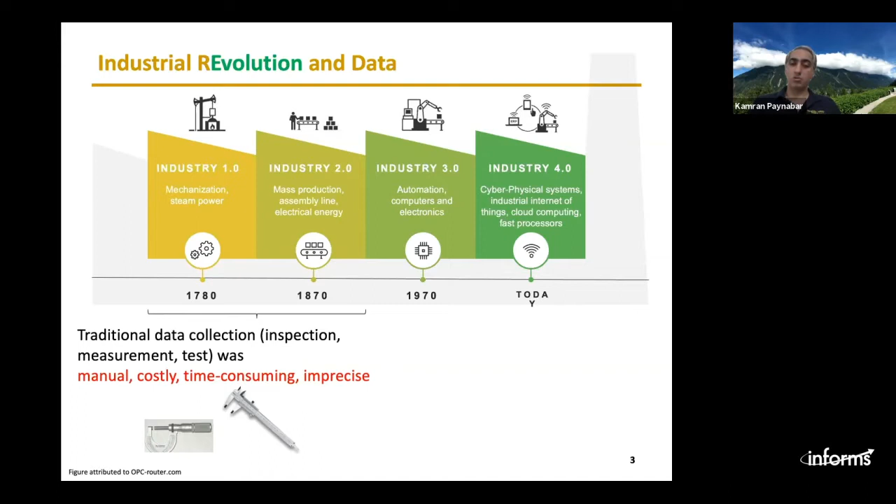So let's look at this timeline from the point of view of data. In the first two eras we had traditional data collection, inspection, measurement, test for quality, and it was manual, mostly costly, time consuming, and sometimes imprecise. However, in the past 50 years, especially during the past 20 years, because of those industrial revolutions, we have significant opportunities in terms of data collection. The technology facilitated automatic instead of manual, inexpensive data collection. It's fast and it's mostly precise.

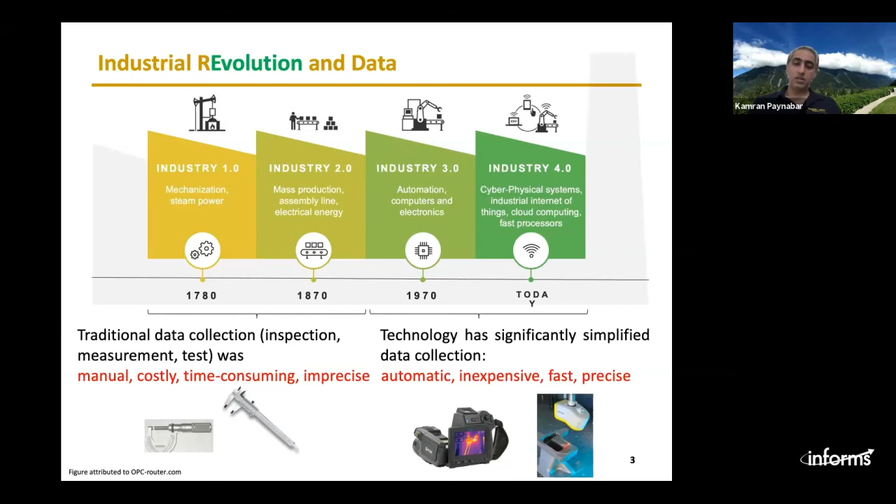Now, this has created a data-intensive environment, a rich amount of data, and some examples of Industry 4.0 type data that we can collect are given here. We can have multi-stream data from sensor readings, for example, pressure, temperature, vibration, and so on. They are mathematically represented by a vector, and the characteristic of the data is cross-correlation among the sensors and autocorrelation over time.

Another type of data collected is waveform signals, profiles, and functional data. For example, here you can see during one operation in a press machine, you can record the exerted force, and that gives you a profile. This is represented as a vector, but it's a function of time or space. They are more high dimensional because each data point can be considered as a function. We still have this temporal correlation, but we have functional structure as well.

Another type of data is multi-channel signals, more complicated, and grayscale images, as you can see when you have different channels of a profile. And this data can be represented by a matrix, as you can see here. And in addition to temporal correlation, we can have spatial correlation as well.

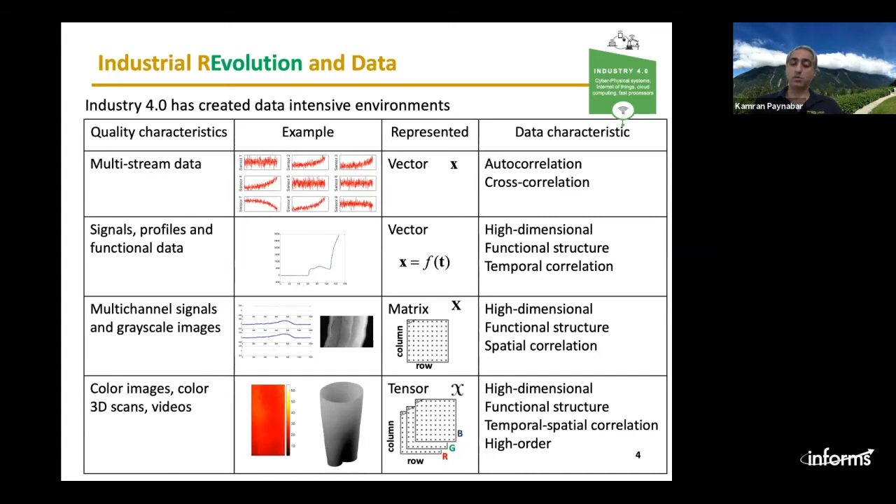And finally, color images, color 3D scans, and videos are other types of high-dimensional data that are collected in this Industry 4.0 environment. And as you can see, they can be represented by tensors or multiple matrices or high-dimensional matrices. And we do have temporal, spatial, and higher order spectral correlations as well. Now, this is the type of data that we have. It gives us opportunity for what?

For process modeling and optimization, for monitoring and anomaly detection, prognostics and degradation analysis, process control, and diagnosis and root cause identification. Basically, for all the classical and traditional problems in quality and reliability that we had before, we have opportunities of using this intense, high dimensional big data to have a better contribution in these areas.

However, as you know, there is no such thing as a free lunch. So it comes with significant analytical challenges due to data high dimensionality, the heterogeneous structure of data. Some of them are profiles, images, videos, point cloud, scalars. Complex correlation in terms of temporal, spatial, and spectral correlation. The need for real-time analysis, because we know that the data are collected much faster. The sampling frequency is pretty high.

So therefore, especially for the cases of monitoring, analysis and control, we need to do analysis on the fly. So we need to have agile computational algorithms for computational complexity, both in time and space, and also dealing with this data requires interdisciplinary expertise that I explain later.

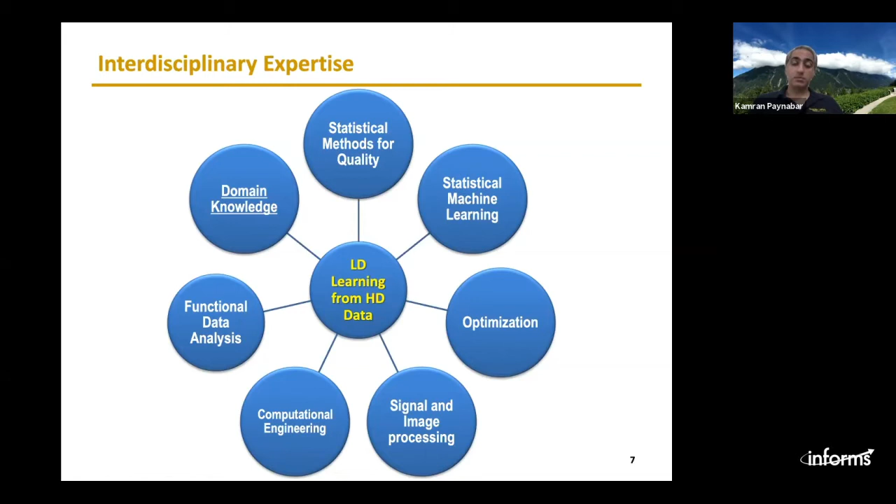Okay, at this point of the talk, I'm gonna talk about how this low dimensional learning can be used for different purposes. I start with monitoring and anomaly detection. So let's look at some applications of system monitoring using high dimensional streaming data. There is one example here, as you can see, the valve seat assembly process. You have a press machine that tries to assemble these valves inside the engine head, as you can see.

And during each operation cycle, I collect this force profile, and I have different operation cycles over time. So it gives me a series or a stream of these profiles. Same thing happens with multi-channel signals. In forging applications, you have 4 sensors mounted on the 4 columns of the machine.

And during each operation, I have 4 channels of the signals. And then I have multiple of those. And I want to use that to monitor the process, for example, to see if there is any missing part in the forging machine.

The rolling is another example. We use a camera to monitor and inspect the surface of rolling to see if there is any quality problem or not, as you can see in this video. And if there is any quality problem here, as you can see, we want to detect it.

Another example is in semiconductor manufacturing, where we have images of a stress map to detect the location, high stress location and defects. So the objective is we want to develop a real-time monitoring method that can be used for all of these types of data.

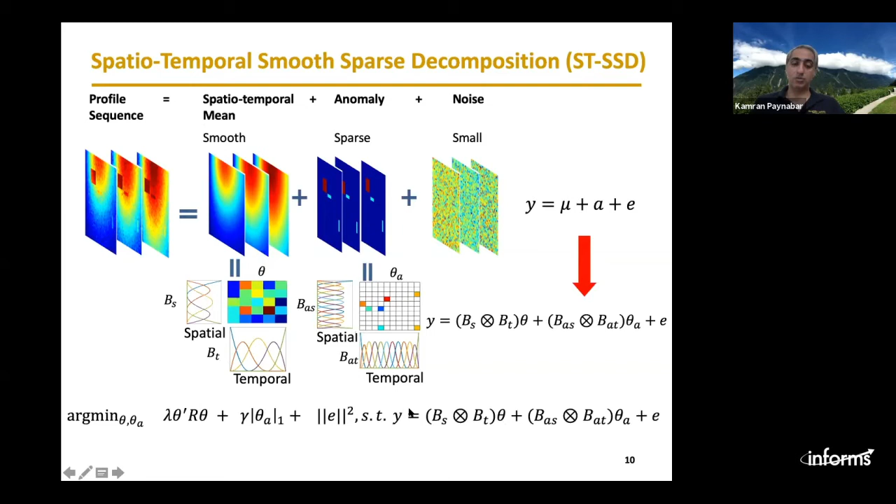And also we have an L1 norm penalty, which encourages the anomalies to be sparse. Then we have a constraint which says when you estimate these and put them together, you want to get your actual, original data. So how can we solve that? We can solve this using basically the accelerated proximal gradient method by Nesterov or an iterative thresholding algorithm.

There are some computational challenges because of the dimension; we have both spatial and temporal dimensions. And we need to have matrix inversion, and the complexity is of order 6. Then, using some tricks and change of variables, we can reduce this to cubic order, which is much better. But the problem is not just that.

The problem is in the optimization over time. So assume that we have these 3 sample data. I run and solve this optimization for these 3. Then in the next step, I have another one. So I need to solve the optimization for these 4, and then for these 5, and then for these 6.

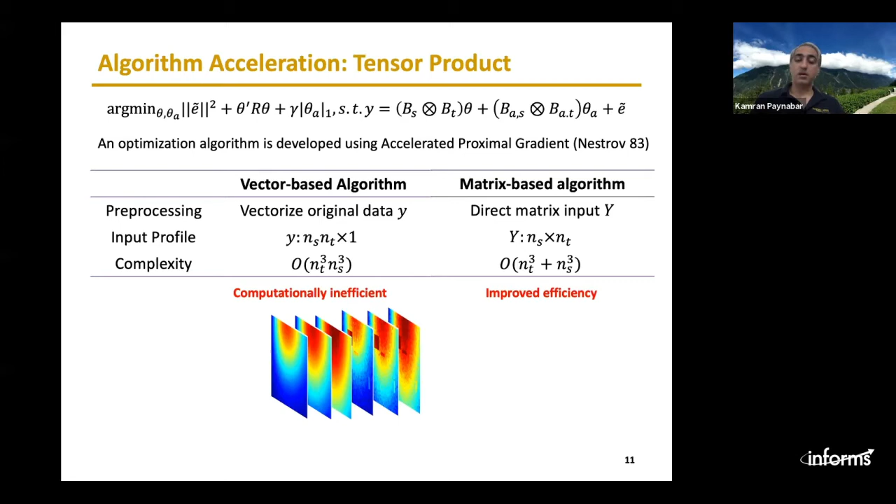So as you can see, when I have new images or new frames of data, then I need to basically solve the optimization problem. At some point, the computational complexity cannot be handled by any algorithm. It's going to explode. So what would be the potential solution?

The potential solution is we can come up with a recursive estimation framework. What does it mean? It means that I can use the solution of the optimization problem at time t and the data coming from t+1, and using this data, I can update the optimization solution.

So that creates a lot of efficiency in terms of optimization and estimation. So under some simplifying assumptions, which is not bad and non-realistic, it's a good assumption, we can show that the solution to the optimization problem along the time direction is in the recursive form. As you can see, solution at time t is a linear combination of the solution at time t-1 and the data at time t. Okay, so that significantly simplifies the computation.

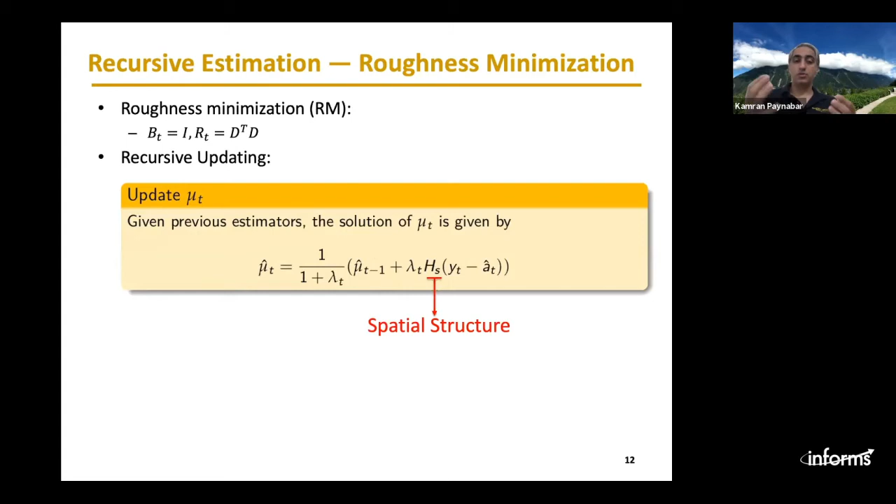So as you can see, this is kind of like the temporal structure, and this part is the spatial structure. So we are combining both temporal and spatial information to update the solution. And in the space, we can also use the previous algorithms and update the solution. So this recursive updating can help us to analyze the data on the fly.

Okay, and as you can see, the computation doesn't depend on the time anymore. So it's fixed, and here we have an index of time, but here we can see it's fixed, and that is the main point, an important point for making the algorithm real time. So here is one simulation I want to show you.

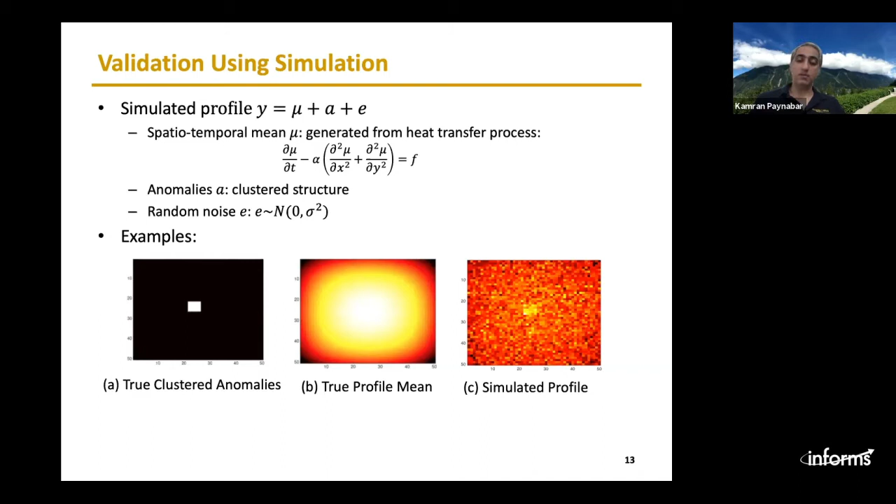This is kind of like a heat transfer process. If you, for example, heat up a steel metal, you can see heat is propagated over the surface. So we are trying to simulate that process, which is a smooth spatio-temporal behavior. And in this video, you can see that in the top left corner, you will see original data, which is very noisy.

Top right, you can see the estimation of a smooth spatio-temporal behavior of the heat transfer process. Here, you can see the detected anomalies, and we have also a control chart. If we detect anomalies, we feed it into a penalized likelihood ratio test to see if it's significant statistically or not. So when I run it, you can see that everything is fine at the beginning.

There are no anomalies, but the spatio-temporal estimation, you cannot see it here, but after estimation, we can see it here. Suddenly we have a defect, we can detect it, and that can be detected here using the control chart. And again, this one is being done in real time.

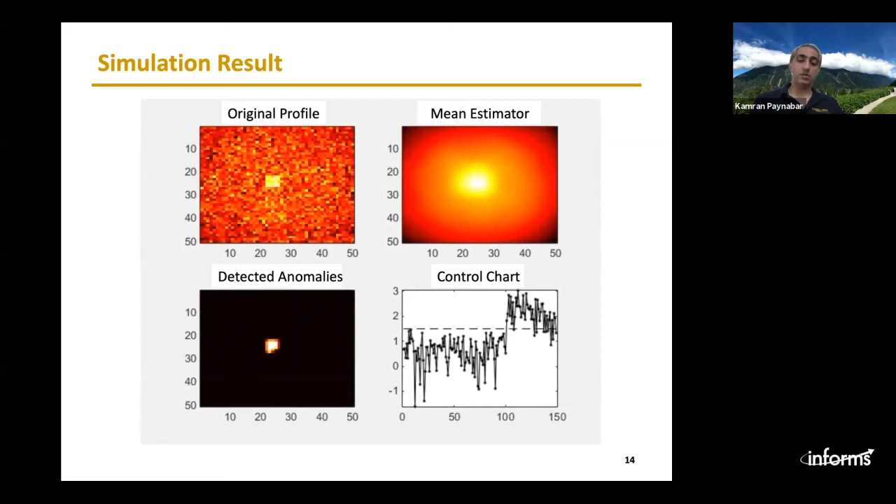Let's look at some case studies. This is the rolling process that I discussed before. So this is the original image of rolling. This is the background, which is estimated. And if there's an anomaly, we detect it here. As you can see, we detect some anomalies, and then the control chart goes out of control.

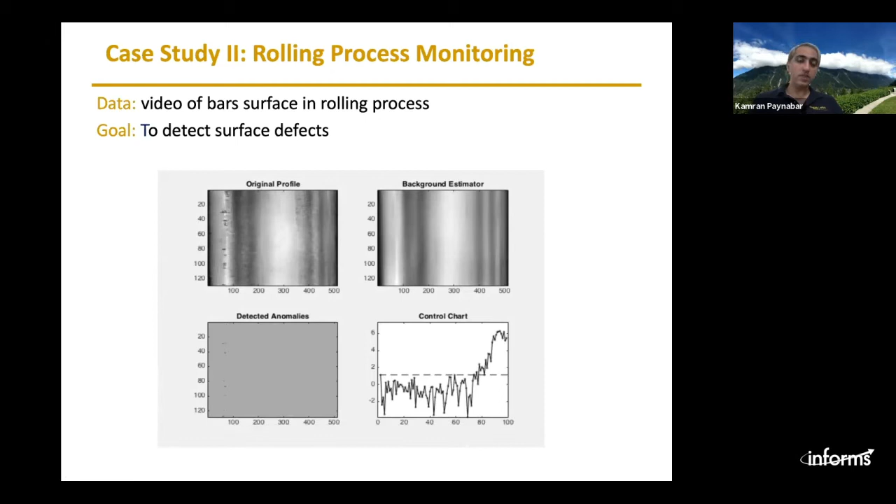As I mentioned before, it's important, this methodology is not just limited to videos or images. It can be used for any types of high dimensional data. This is another example where we used it for multi-channel signals in the forging process. So you can see there are basically different operations over time.

We have this sequence of profiles, and then there is a missing part at some point, and we can detect that missing part here. And as I mentioned before, we can do diagnosis. For example, here using this heat map, I can pinpoint which channels are more sensitive to that change, and which area of the signal is more affected.

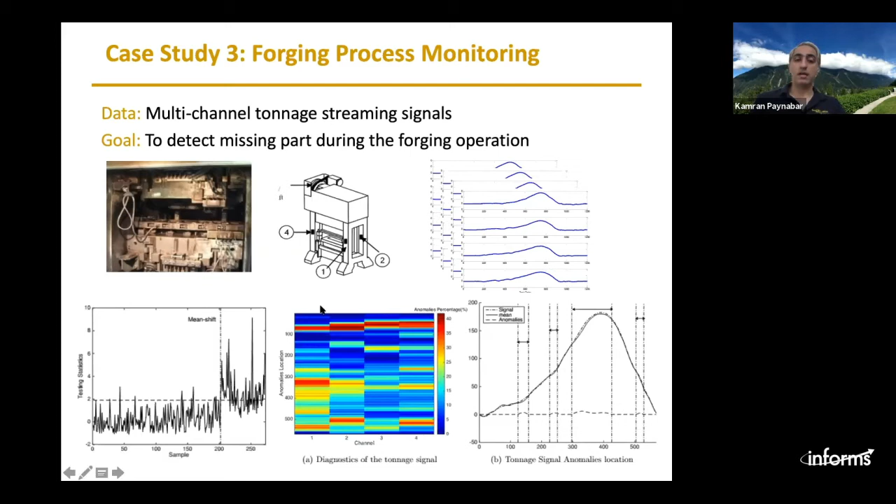As you can see, channel 1 is more sensitive to this change, and it turns out the missing part is closer to this column, which is captured by channel 1. Okay. So here are 3 examples of how this framework can be used for process monitoring and anomaly detection.

The second topic is process modeling and optimization. So in some cases, we are interested in finding the relationship between process variables and the quality characteristics of output, okay? One example is in semiconductor manufacturing. This is sort of a stage-wise and layer-by-layer process, and in each layer we have deposition of some pattern.

And it's really important that these layers be aligned. The misalignment of these layers creates something called overlay error. And this overlay error can be represented by a heat map, as you can see here. 0 is where there is no overlay error, and then the rest is basically deviation from that 0.

And this can be influenced by a series of process variables, as you can see here, for example, deposition rate, temperature, pressure, and so on. Now, these process variables are in the form of profiles, and the output is in the form of images. So both of them are high-dimensional data. The question is how I can find a function which shows the relationship between these two, because later on that function can be used for process optimization or prediction.

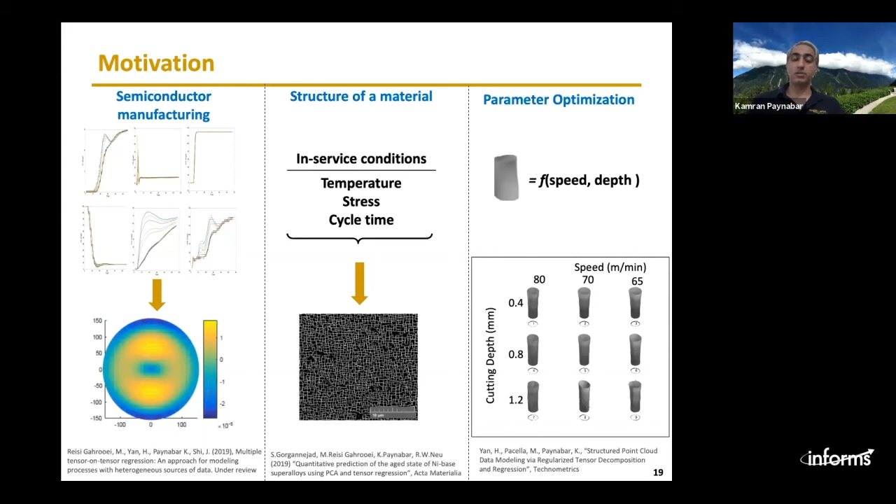The last example is process optimization, parameter optimization. Here is a machining example: in machining we are producing, let's say, cylinders, and two variables are important, the speed of the machine and the cutting depth. We want to know the relationship between the speed and depth, and the outcome is the point cloud, which shows the geometrical information or dimension of this cylinder. There are other examples here, but I skip them in the interest of time.

But here is the problem that we are trying to model. We have n samples of training data, and these samples are heterogeneous high-dimensional data. For example, they could be images, profiles, or point clouds. And the output could also be anything: a scalar, a point cloud, any high-dimensional data. What we want to do is use this training data to learn a function which relates these inputs to the output, and then use this function later for prediction or process optimization.

The methodology that we use here is Tensor-on-Tensor regression. So what is a tensor? A tensor is a multi-dimensional array. For example, a vector is a one-dimensional, or first-order, tensor. A matrix is a two-dimensional tensor, and a sequence of images is, for example, a three-dimensional tensor. Okay. Now, the way that we want to model the problem, as I said, is as a regression problem.

So Y is a high-dimensional object, and we have an inner product of the input and the corresponding coefficient, plus some noise. This is very similar to regular linear regression. The only difference is that the objects, the coefficients and the inputs, could be different. One could be an image, one could be a profile, and the dimension of the coefficients corresponds to the type of input that we have.

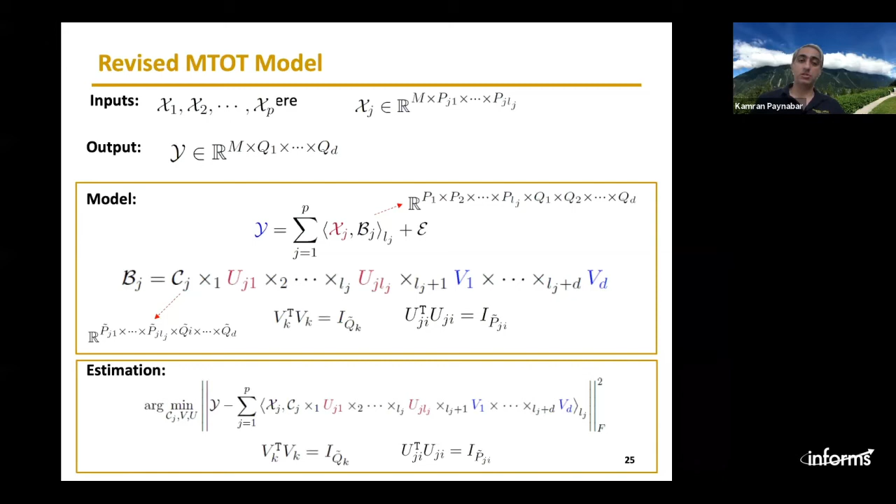Okay, now let's look at the case study here, the process optimization. So you remember the input is a scalar, speed and depth, and the output is a point cloud. We want to first learn the A, which is the tensor coefficients. Using this methodology, we can do that. This is the coefficients for depth. This is coefficient for speed. For example, if depth is 5 multiplied by this coefficient, and whatever speed is multiplied by this coefficient, we can get the resulting point cloud.

Okay. Now, at the end of the day, we want to optimize the process. And optimization here means that I want to minimize the deviation from nominal values, the ones that I have from the drawings, from the design. And at the same time, I want to make sure that the variance is less than some desired value. And I know that I have operational range for speed and operational range for depth.

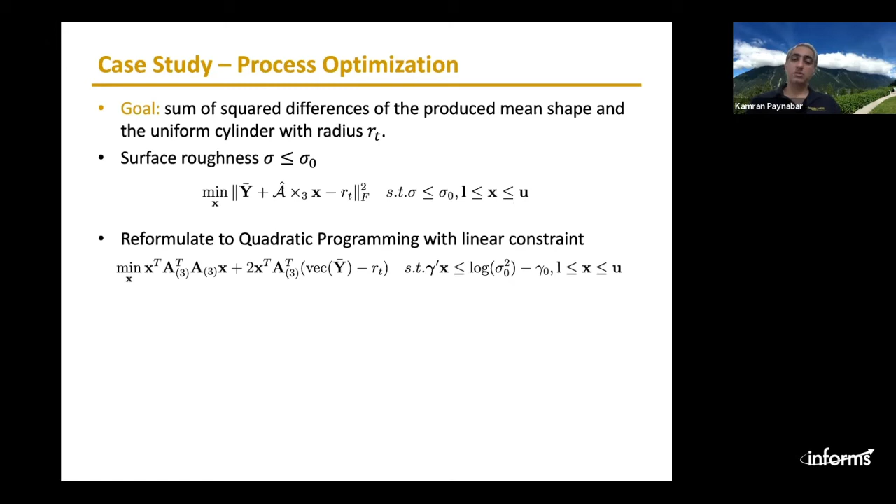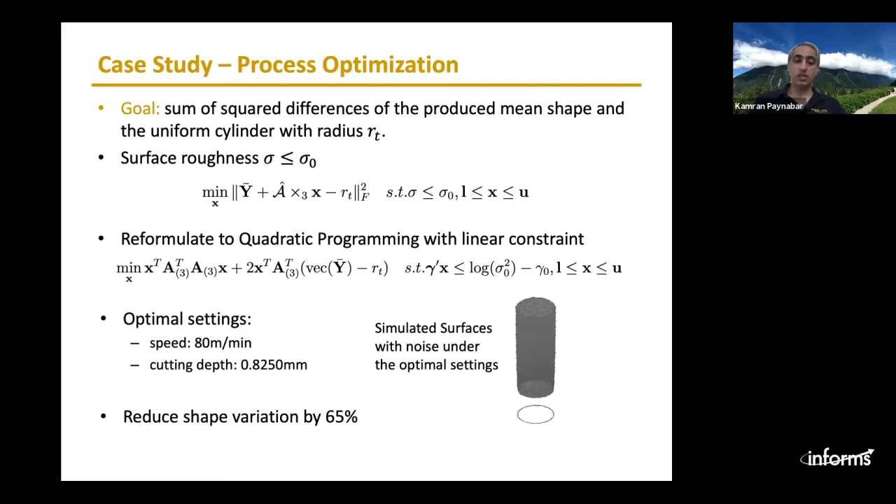So solving this optimization problem based on the coefficients or the relationship that we estimated before, we can cast the problem as a quadratic programming with linear constraint, and we can find the optimal settings 80 and 0.825. And as you can see, the resulting cylinder is much smoother with less deviation, and we can reduce the shape variation by 65%. If you compare this shape with the ones that we have here, we can achieve a lot of improvement.

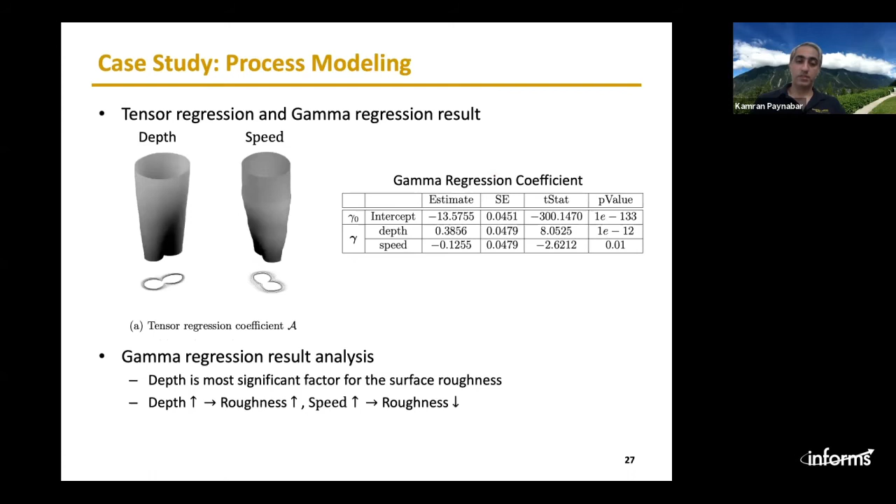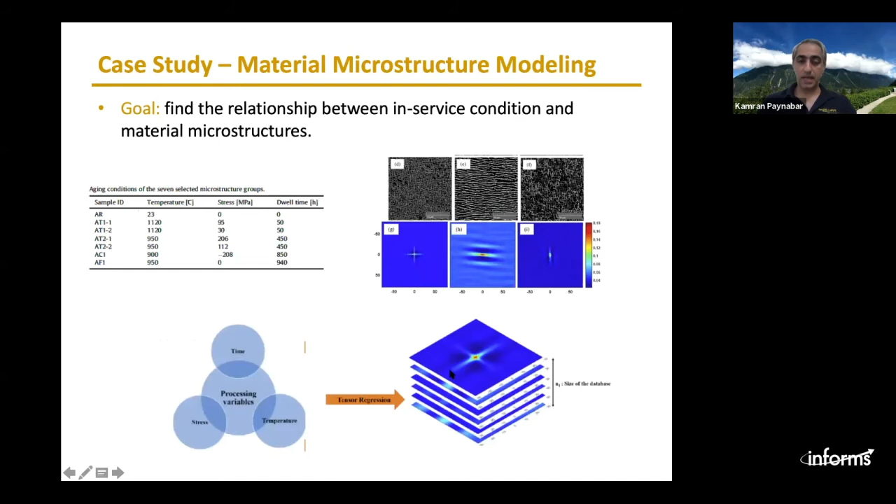Okay. Another case study is in material microstructure modeling. Again, we want to find the relationship between input, which is time, stress, and temperature, and the output, which is microstructure. By the way, microstructure is translated to a heat map known as 2-point correlation heat map. So we want to use this information to estimate this heat map. And here is the result that we have. This is the original image, one example. And this is the tensor regression. And this is the PCA method.

So if you use PCA instead of tensor regression, you can see there are a lot of subtle variations that are not captured by the PCA estimate. However, they're captured by the tensor regression methodology. And you can see in terms of standardized mean square error, tensor regression is performing much better than PCA.

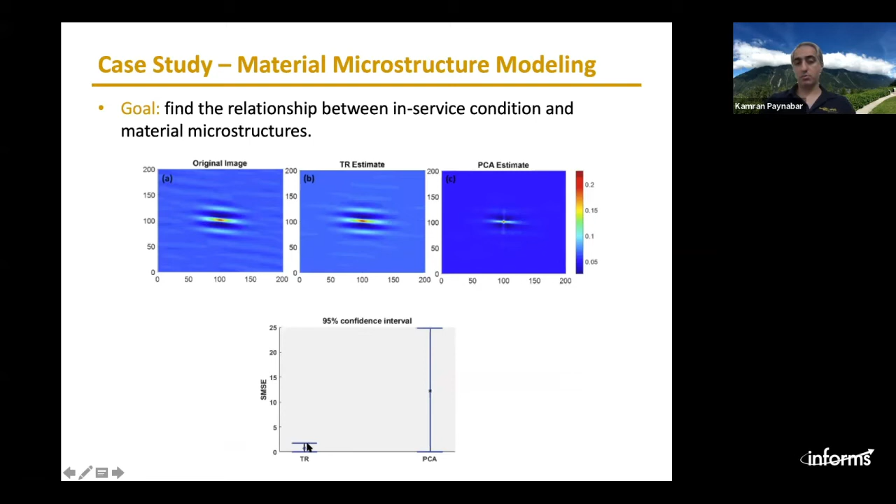Final example in this area is engine calibration. In the diesel engine, it's important to calibrate the engine to avoid pollution. One important factor here is called the lambda signal. The lambda signal is related to some pollutants. So if it goes below a threshold, then the treatment of exhaust gas has a problem, and it's polluting the environment. Okay. So it's basically related to nitrogen oxide.

We have different engine variables or sensors that we can use to control that. For example, inner torque, speed, and so on and so forth. So we want to find the relationship between these input profiles and the outcome, which is a profile. So in the previous examples, inputs were scalar and the output was an image. Now we can see inputs are profiles and output is a profile.

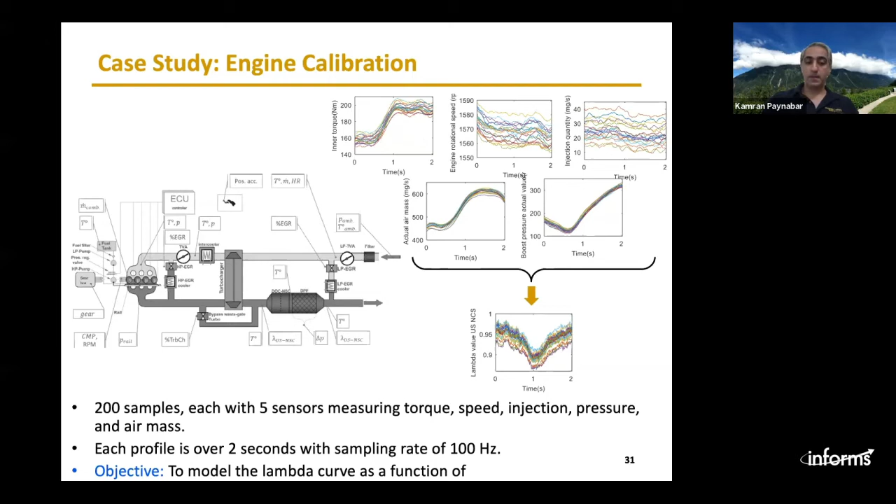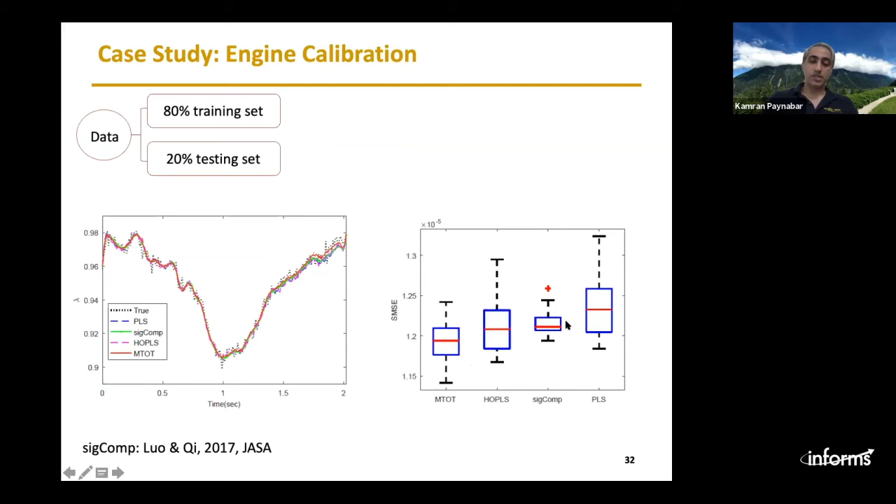So we do that, and we can see we can have very nice estimation using this method. And as you can see, the method, the MTOT, which is the tensor regression, is performing much better than other benchmarks, for example, partial least square or higher order partial least square or SIGCOMP. Okay.

Now, the next topic is process control. In process control, process optimization starts with process modeling. So we find the relationship between input and output, and then we want to optimize it. But this optimization is being done offline. In process control, we want to do this optimization online, meaning that we have a target and we want to achieve this target over time by changing some control variables.

Okay, so we have two steps. The first step is offline estimation, and the second step is the online control. The offline estimation is done very similar to the process modeling that I discussed earlier. However, there is one change: offline estimation in the previous case was static, but here we have time series data, or time series of objects. So that should be taken into account because we have temporal structure as well.

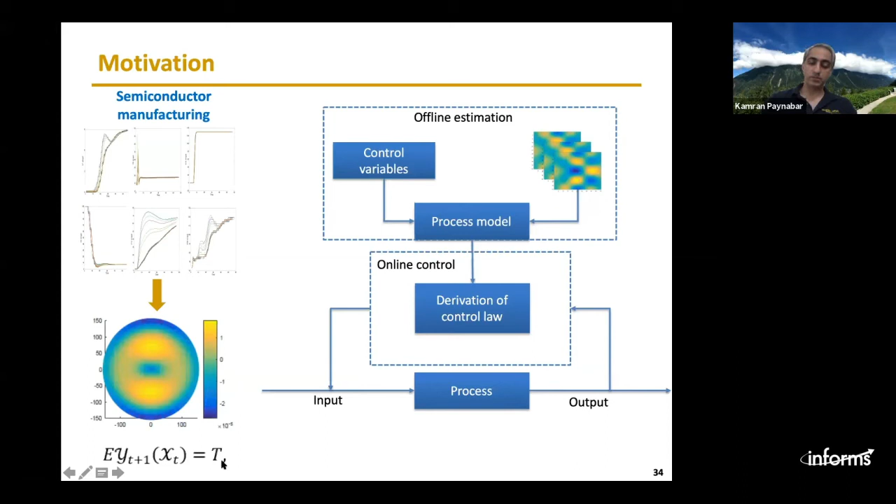And in the online control, we utilize this model and we want to derive a control law which minimizes deviation of the output from the target. That's what we want to do in online control. So the first step is offline estimation. The offline estimation is done, again, by tensor regression modeling, but the tensor regression was static. Now we have time series data.

So we extend this concept to time series data, and we propose a tensor-based ARMAX model, because X is basically the control variable. As you can see, Y with lag of P is related to the previous objects. We have these coefficients to estimate, and we also have these control variables with the corresponding coefficients. And we also have non-IID noises. So the problem is now to estimate these coefficients, okay?

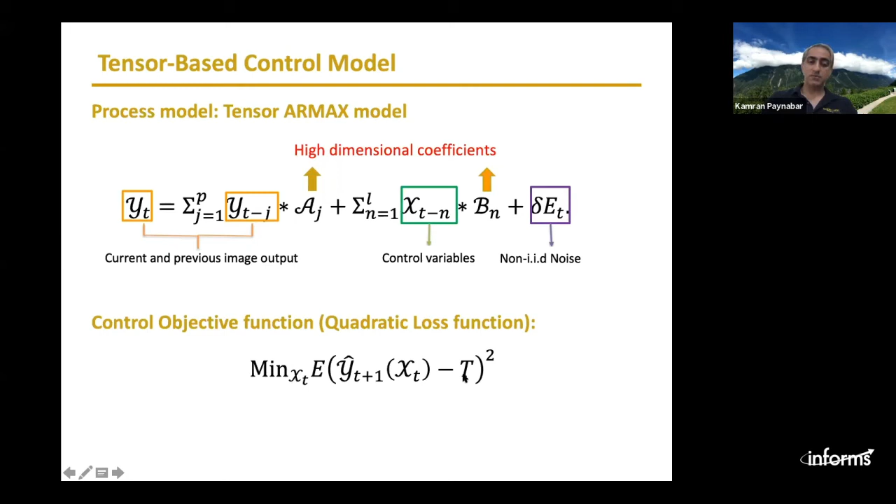And after estimating these coefficients, the second part of the problem is the control objective function. We want to find the optimal value of the control action such that this difference is minimized, okay? The quadratic loss is minimized. I don't go through the estimation, but again, it's similar. We utilize the low dimensional structure for estimation. I'll just show you some examples.

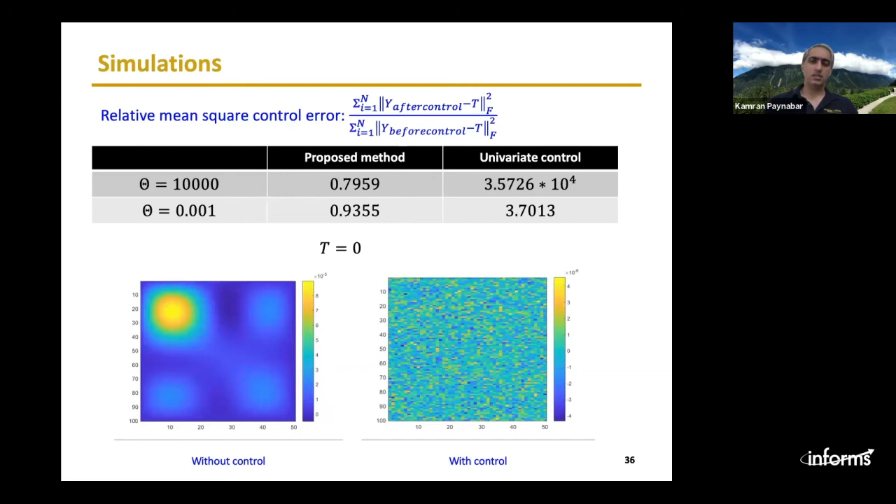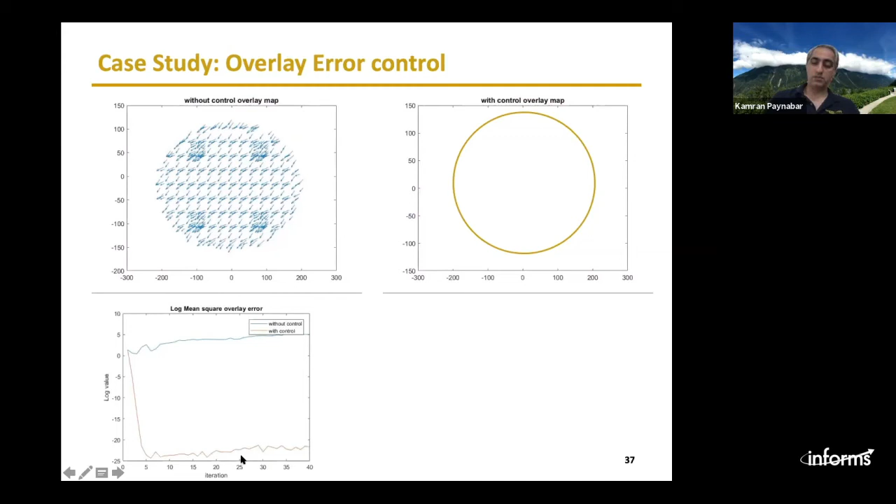The next topic is prognostics and degradation analysis.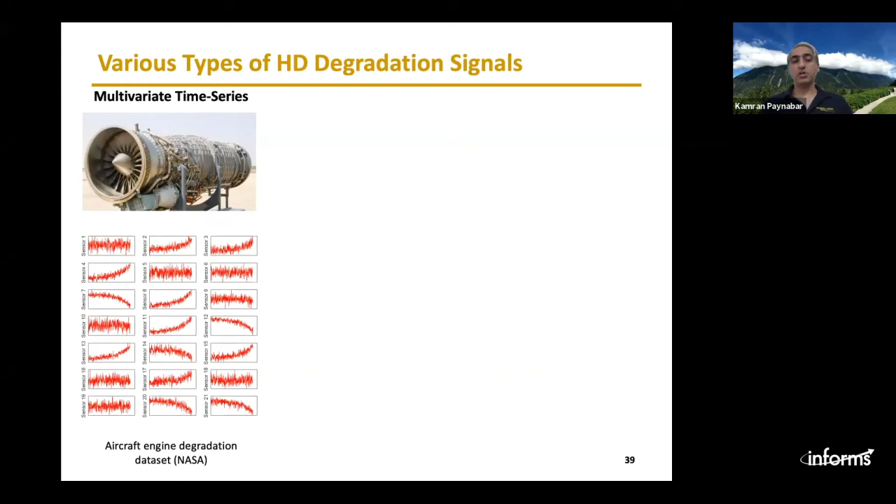So far we covered monitoring, process modeling and optimization, and process control. Now, what if we want to do predictive analytics in terms of predicting the remaining lifetime of the system? We may have hundreds or thousands of sensors on an aircraft engine, and we want to use this information to predict the remaining lifetime.

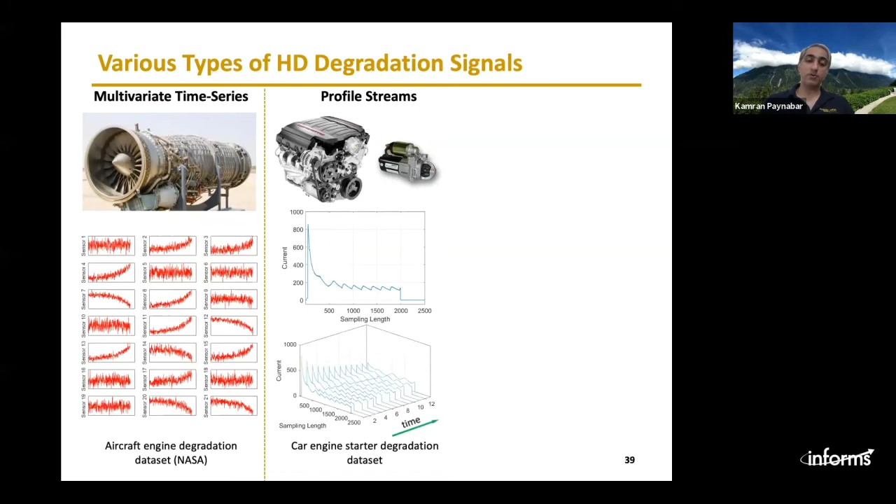It could be a profile, for example, a starter profile in the engine. And over time, we want to analyze these profiles to see what is the remaining lifetime of the starter, or we can have the infrared images of the bearing and predict what is the remaining lifetime of the bearing. So these are all high dimensional data that we want to use for degradation analysis.

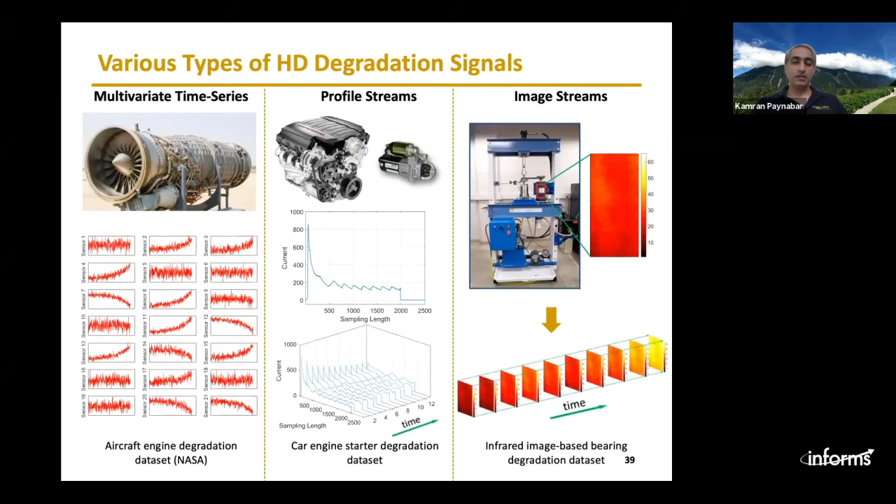So the objective is, if I have a set of training data, which comes with a signal, and we have the corresponding time to failure, can I use this high dimensional signal and find the relationship between the input and the output for predicting the time to failure? And then later on, for a new one, I can use this information, update the model and do the prediction over time.

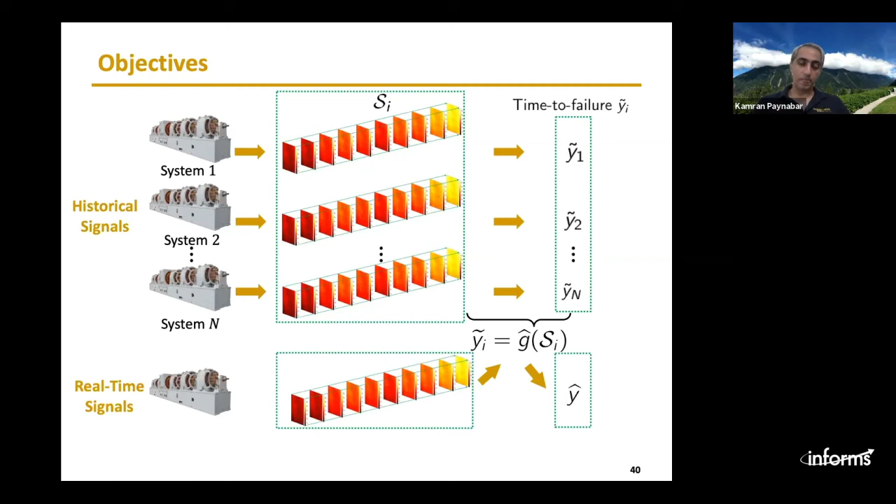That's the objective. So as you can see, this is really similar to Tensor-on-Tensor regression. The input is a tensor and the output is just a scalar. So we use a similar approach here. However, one difference is that because we are dealing with reliability and time to failure, the normal may not always be the case. The normal loss function is the ordinary least squares. We may use different distributions, for example, log location scale distributions.

So we developed a tensor-based method. We combine the tensor methodology with the log location scale regression model, which is highly used in reliability, and can cover a family of distributions like normal, lognormal, Weibull, smallest extreme value, and so on. So how it works, we say yi is coming from this log location scale distribution, with mu, the location parameter, and sigma, the scale parameter.

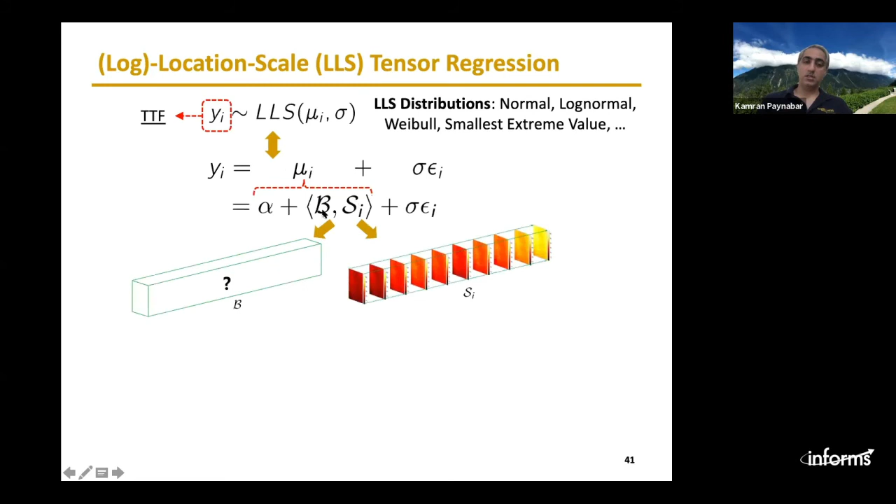This mu is a function of the signal and the coefficients. So I can represent this mu as a function of the high dimensional data that I have with these coefficients. And then again, the question is the dimensionality, and we can use a similar methodology to do the dimension reduction. However, this dimension reduction should be done in the context of maximum likelihood estimation. So we propose a penalized maximum likelihood estimator here, which is combined with Tucker or CP decomposition for dimension reduction.

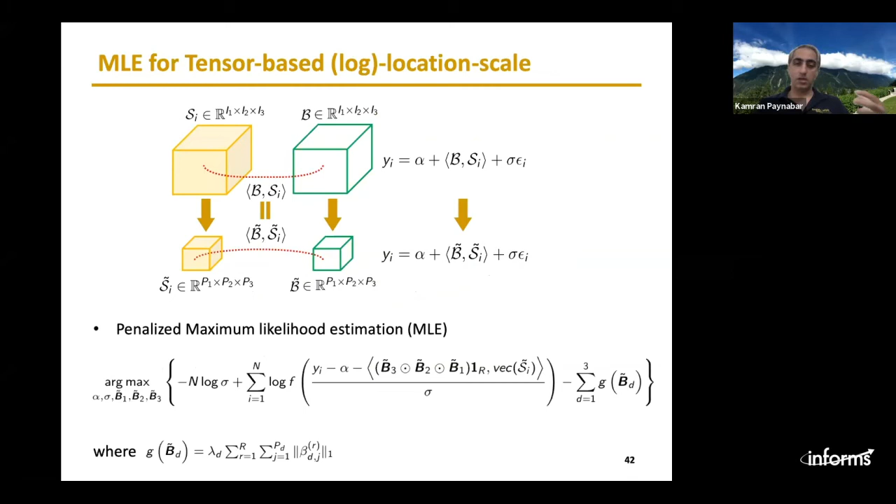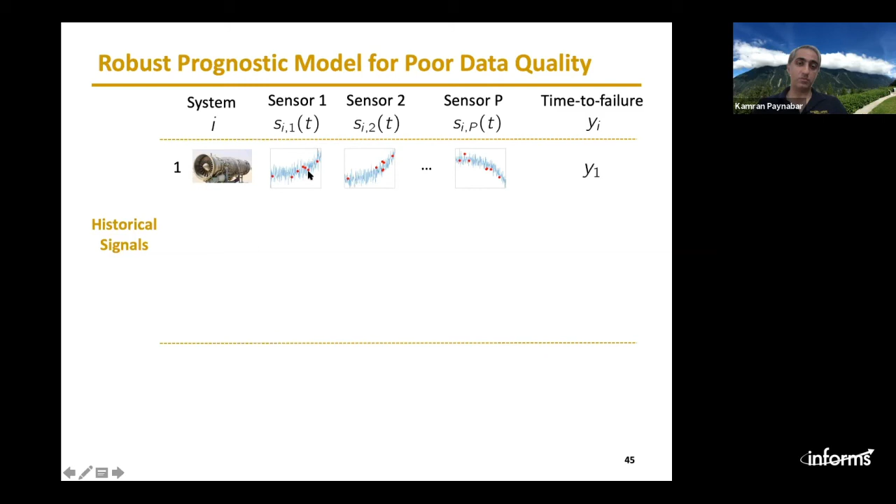I have training data and I want to do the same thing. On top of that, we may have censored data on the Y as well, because we cannot run the experiment forever. So we may have censored data at different times. Now we want to use this data to find a predictive function that can be used for real-time, online prognostics modeling and prediction.

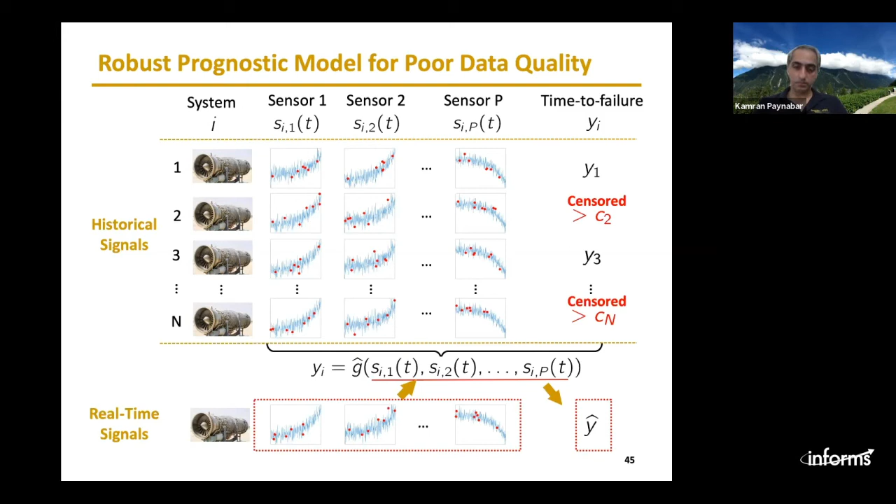So the way that we modeled this problem was using matrix completion. With matrix completion, I can put all these signals together. And if I do that, then I have a big matrix with some missing values that I want to estimate.

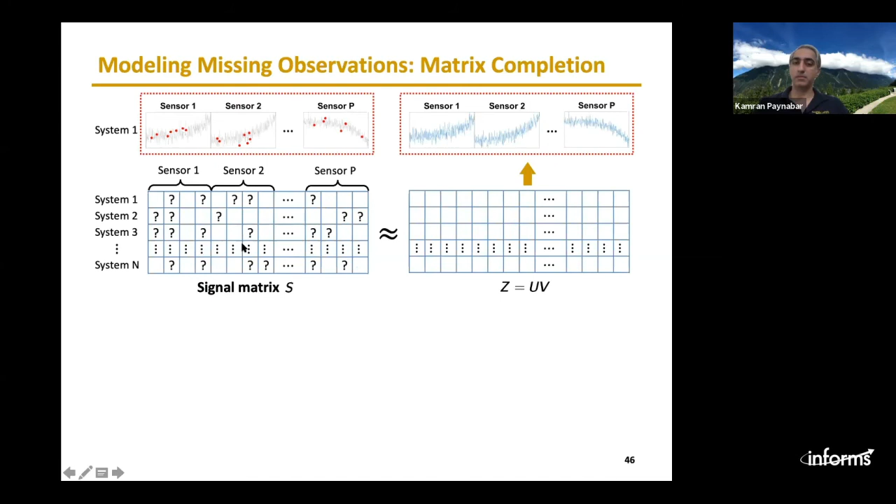So matrix completion has been used and studied widely in the area of machine learning. And one way of dealing with this problem is matrix factorization. So basically you want to find the factorizing matrices of this incomplete matrix such that the error for observed data is minimized, and you want to make sure that these factorizing matrices are low rank. So that's basically the objective function for matrix completion.

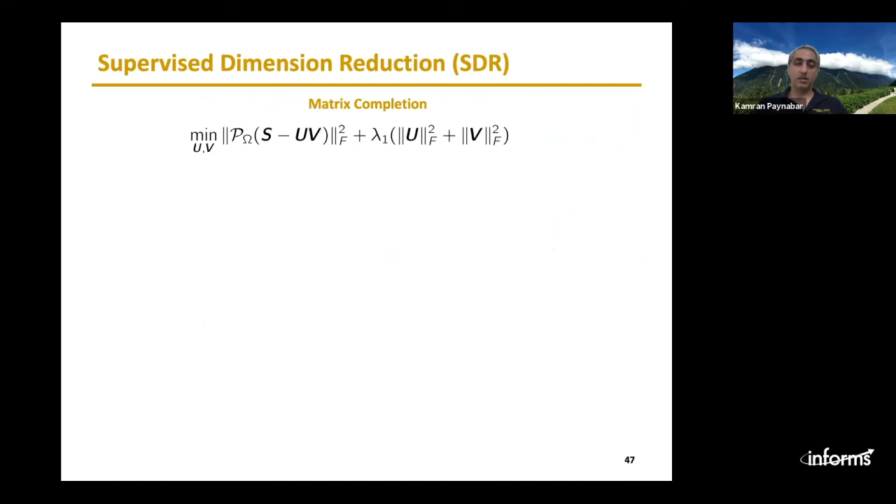But we don't want to do matrix completion first and then do estimation second, because we know that there is some information in the relationship between Y and S here, which should be used in the matrix completion task. So what we do, we combine the regression task and matrix completion and create a matrix completion in the context of maximum likelihood estimation. So we get a penalized maximum likelihood, which has two parts. The first part is matrix completion, and the second part is the regression part. And we have constraints that show whether we have the sensor data or not.

So solving this optimization problem can help us not only recover the missing observations, but also predict the remaining lifetime of the system with missing data, with sparse signals, the signals with missing data or corrupted data.

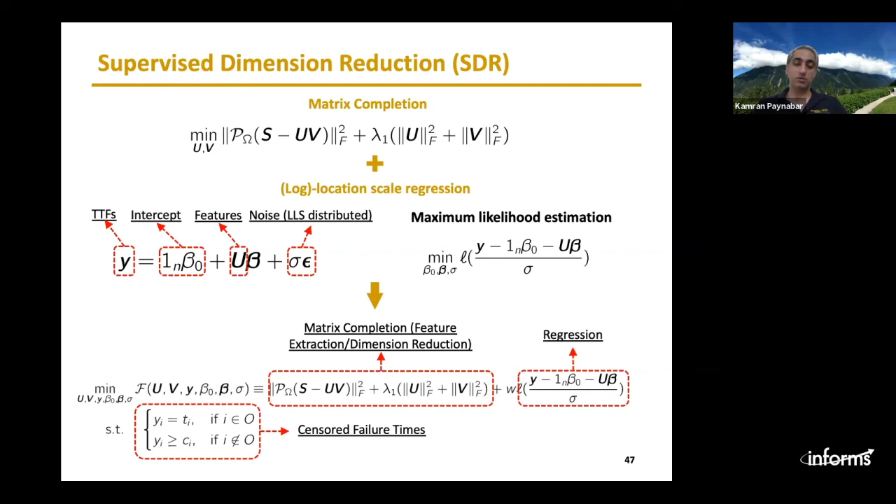And the reason is because SDR is taking advantage of all this information: the recovered signal itself, other signals from the same sensor, signals from other sensors, and also the information of TTF. So it takes advantage of all these pieces of information to do the prediction and imputation.

Just to wrap up my presentation, we presented a framework of low-dimensional learning from high-dimensional data, both in the static fashion and dynamic fashion for streaming data, and used this framework to revisit quality and reliability problems such as monitoring, anomaly detection, control, process modeling and optimization, and prognostics. There is a lot to be done. I would say the research opportunities in this field are vast, and I would encourage everyone who is interested in that area to start working in that area.

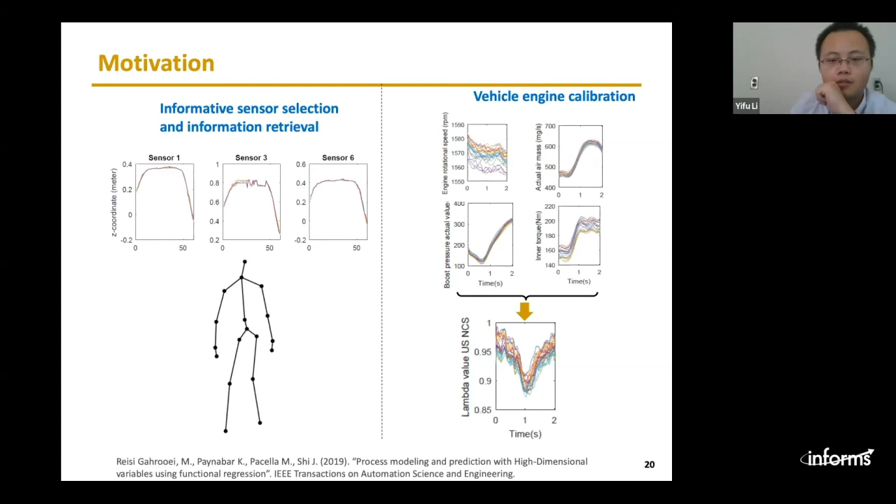Great, thank you. Sure. Kamran, we also have some questions in the question and answer panel. Will you be able to see it? I don't. Can you read them out for me? Yes, I can definitely do that for you.

So the first question here is from Professor Byung, saying that this is a great talk. Thank you so much. I do have one question. When you explained Industry 4.0, you mentioned cyber physical systems and IoT. So how is your research related to cyber physical systems and IoT?

Basically, the research that I'm trying to do is like after the fact. This IoT, Internet of Things, and cyber physical systems, where machines talk to each other and so on, can give us the opportunity to collect the data. That was the main point. And then my research is more on: if I have this vast amount of data, how can I use that to improve and model the systems?

So in the context of how the relationship between machines and sensors and so on can be used for improving or modeling the system, I've not done any research in that area, but I think it's a very important research area that requires further exploration. But this is not my research.

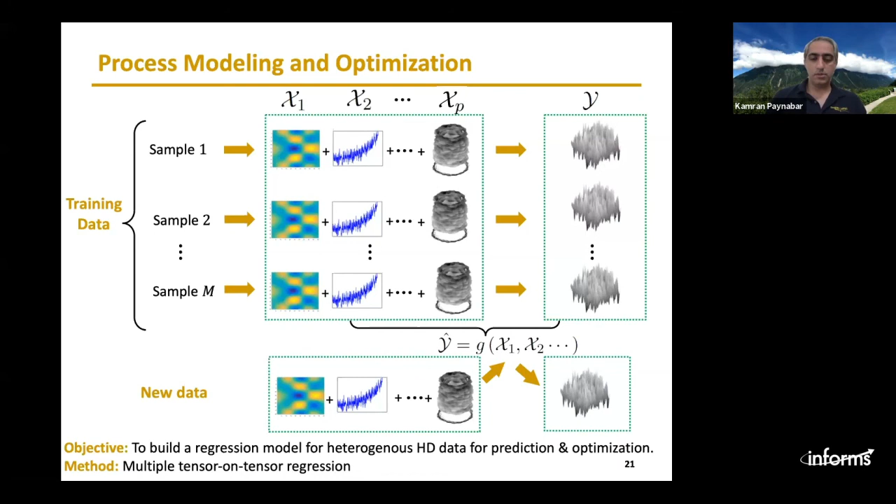So instead of monitoring the whole thing, that helps us with dimension reduction. We are separating the suspected region, the region where we guess anomalies can happen, get those low dimensional regions, and then apply a hypothesis test or penalized hypothesis test on top of that, which is the control chart. Okay.